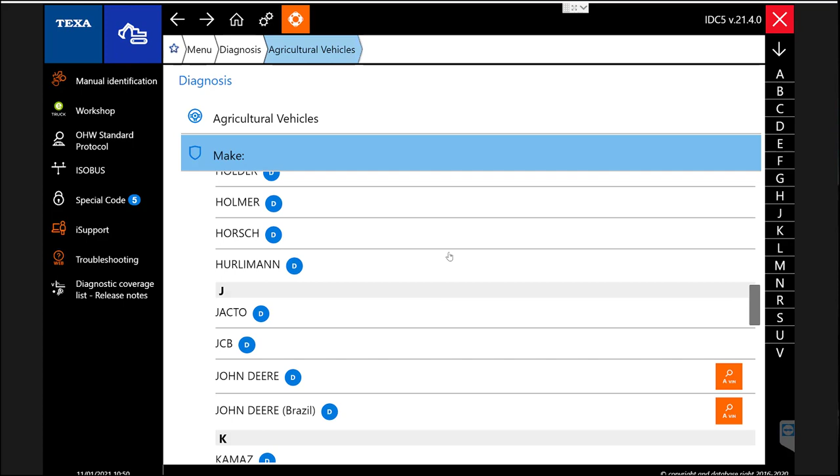I've been asked if I can just show a little bit of the coverage of off-highway software, particularly the construction vehicles. So we'll go into off-highway and we're going to go and have a look at construction, but just so you know, this is everything that you get in off-highway. So agri vehicles, so all your agricultural vehicles are listed in here. I'll quickly scroll down through them.

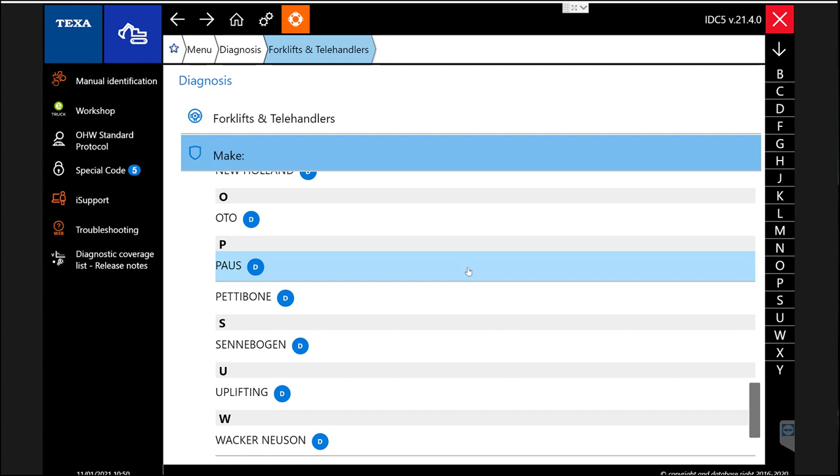Okay, they're your agri vehicles, and your construction vehicles, all the different manufacturers down through there. There's a good range of them available. It also gives you forklifts and telehandlers, so all the major ones will be found in there. Okay, and trains, if you're working on a locomotive, the engines you'll find in them usually.

Industrial engines, so if you can't find a make or manufacturer that you're looking for, because you could be working on, I don't know, a crusher in a quarry, or you could be working on a big generator or anything like that, rather than looking for the manufacturer, or if you can't find a manufacturer because there may not be one, you know it's got an engine in it that's running it usually. So you're more than likely going to find it in here.

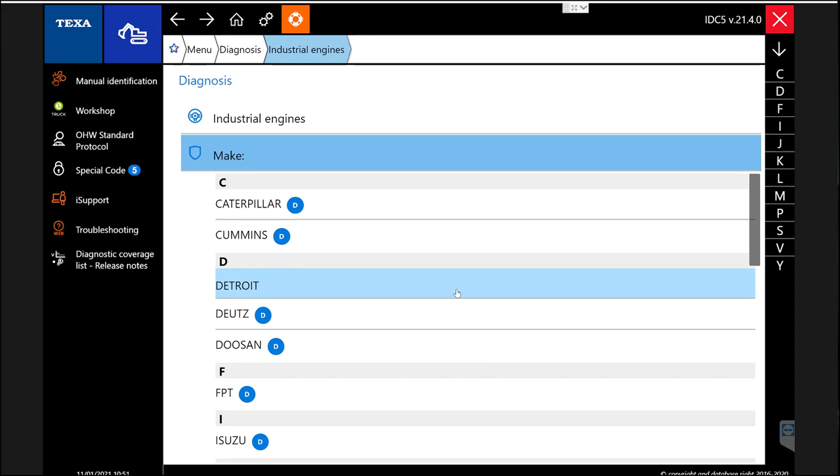So there's always a way to connect to something. If it's got a diagnostic plug, there's a good chance that you're going to be able to communicate with it with Texa. So, construction vehicles. I'm just going to scroll through this list a little bit slowly. Somebody's asked me what sort of make and models it covers. Well, the easiest way is to do this.

Now, if you want this information, you can always register at Texa UK, texa.co.uk, and if you register on their website, you can actually go through the software list to have a look at the coverage of all sorts of stuff. There we go, they're all on there.

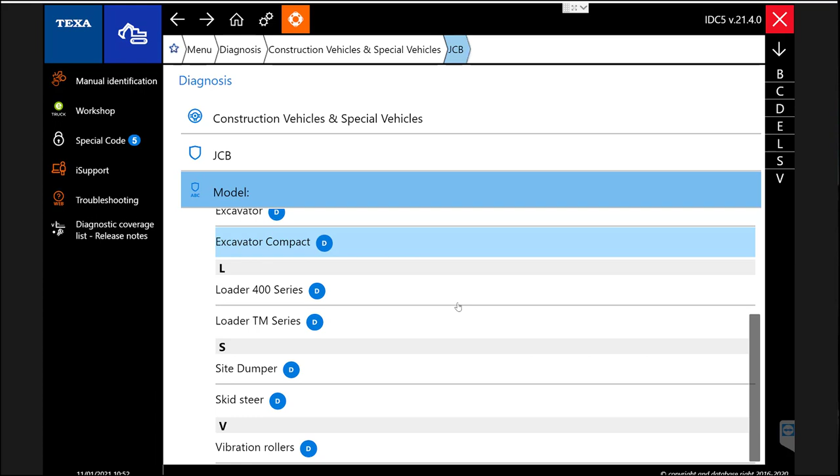So let's go and have a look at something. I think Liebherr's got a pretty good demo on it, but JCB, we could go in there. Let's have a look. What have we got in JCB? Site dumper, why not? Ecomax engine, doesn't give us much information. So let's assume I don't know what cable I'm going to need now to plug into this JCB.

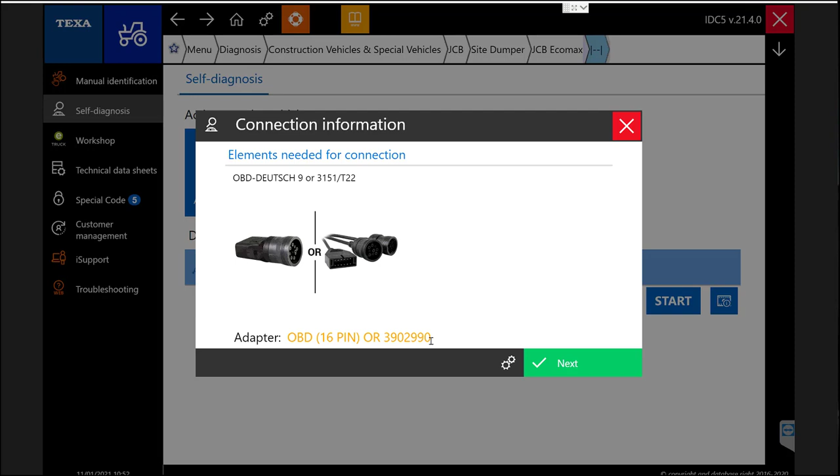We'll hit this little button here, which is the information button, and it tells me I need Deutsch 9-pin. So I can either use a Deutsch 9-pin connected to an OBD cable at that end, or I can use a T22 and the intermediate cable, the 3902990, and then I would click next once I've connected, but as I'm on demo I can't. I'm not sure what this demo software is like on here, so we'll just have a quick look in there. Might choose something else.

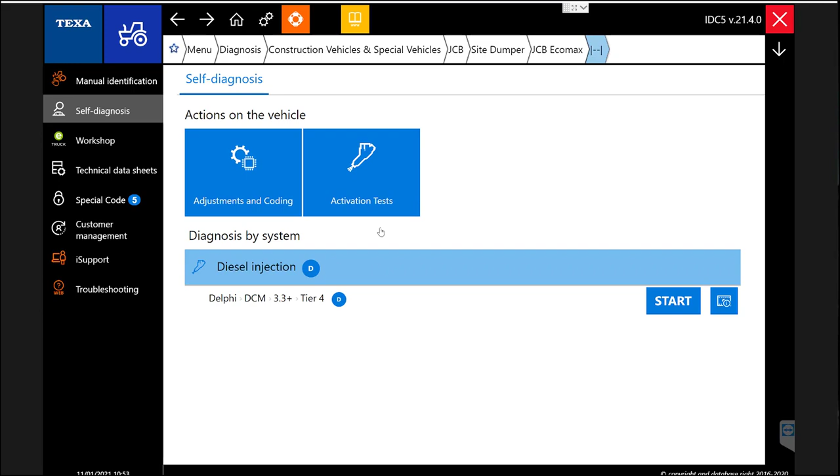Okay, turn on instrument panel. No faults, rubbish one. Let me go and find something better. We'll go to the Liebherr. I'm sure that might have a fault on it. We'll scroll down to Liebherr.

I hope I'm pronouncing that properly. If anybody from Liebherr wants to tell me how to say it properly, then you can tell me off.

Right, what have you got? Excavators, loaders. Why not excavator? Let's go in there. So before I even go in there, this is the system. Engine is available to me. That thing flashing at me was a total global scan 3. That will basically look for any ECUs available and then go and talk to them and see if there's any faults registered and so on.

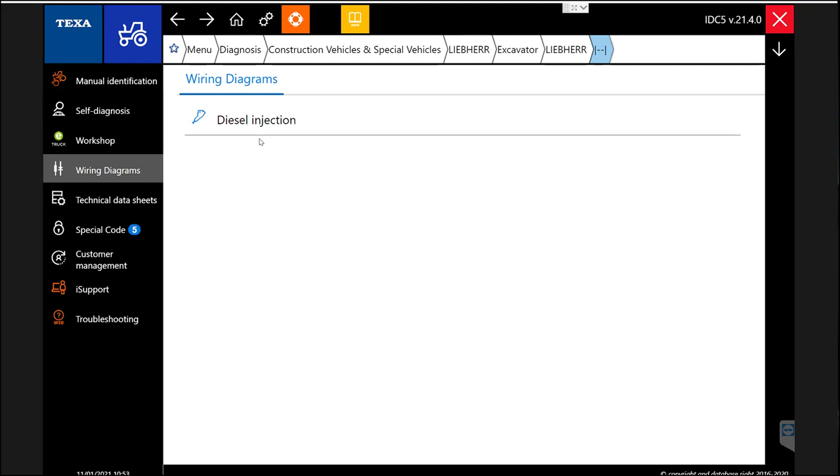But from this page, I can see we've got some wiring diagrams available. So if I click that, it's the engine wiring diagram. I need to choose an engine. I'm just going to pick any of them. The middle one will do.

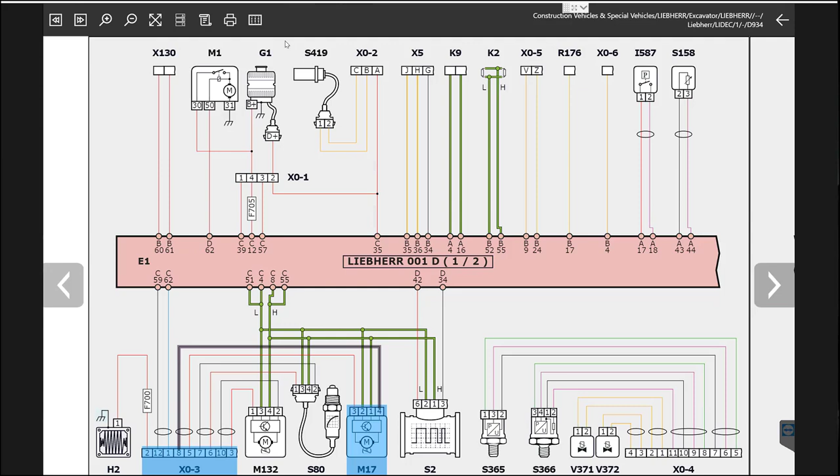And to use that better, to save me looking, if I wanted to see where that wire goes, I can do it that way and I can see it quite clearly, pin 4 of that and what they are. But if I want a bit more information, there's this little icon up here. I can click. Yeah, I don't need to see that again. And it will tell me what it is. Interconnection plug, so it's just a wiring block.

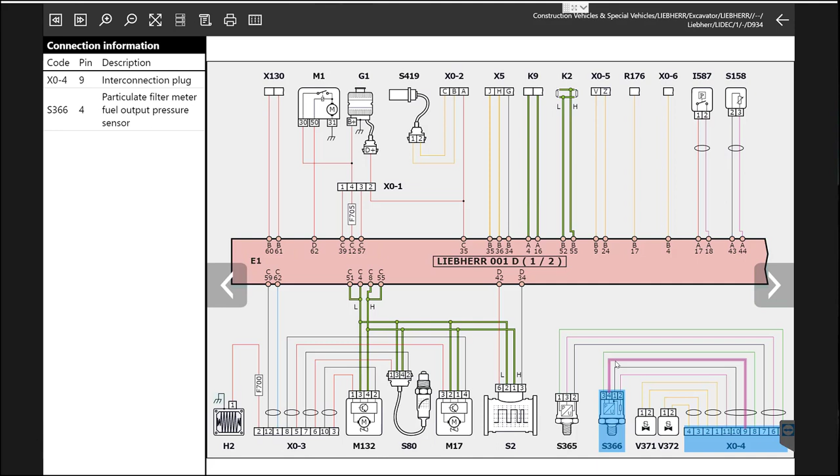And pin 8, and then M17 intake manifold throttle motor module is this fella here. So I can do that with any of them. If I click on them, it does exactly the same thing. I think you get the idea, or hopefully you do. As with Texa wiring diagrams, you can click on a part on these and you will see that there is usually a card of information available.

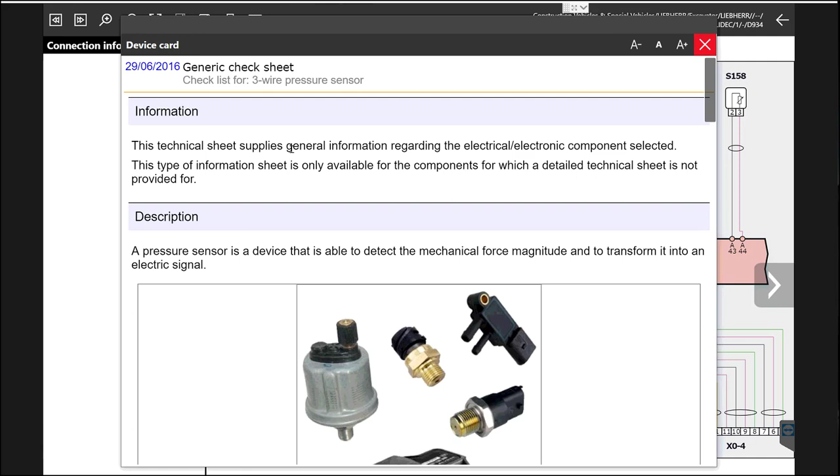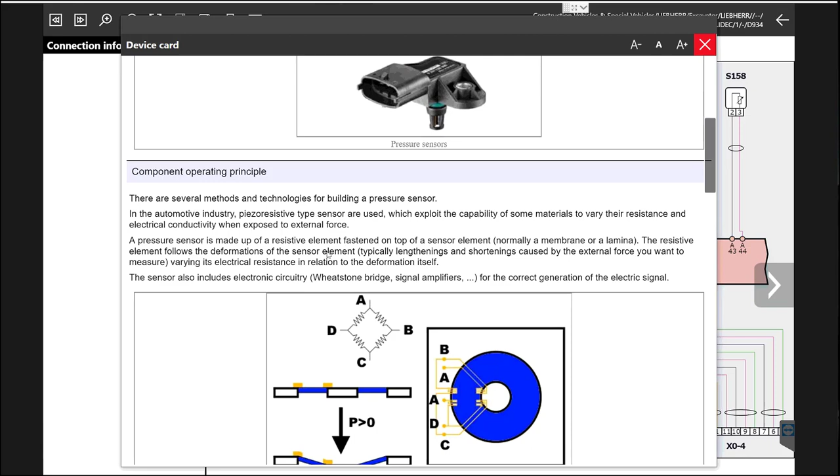So pressure sensor, generic sheet. So this generic sheet will show a range of pressure sensors, what they could look like, different sorts of pressure sensors. Let me make that a bit smaller, that's better. Okay, so it'll tell you how it works. Takes you back to college, look. And then it will tell you what you should be looking for when you're testing them on the pins, references, using an ammeter or a voltmeter.

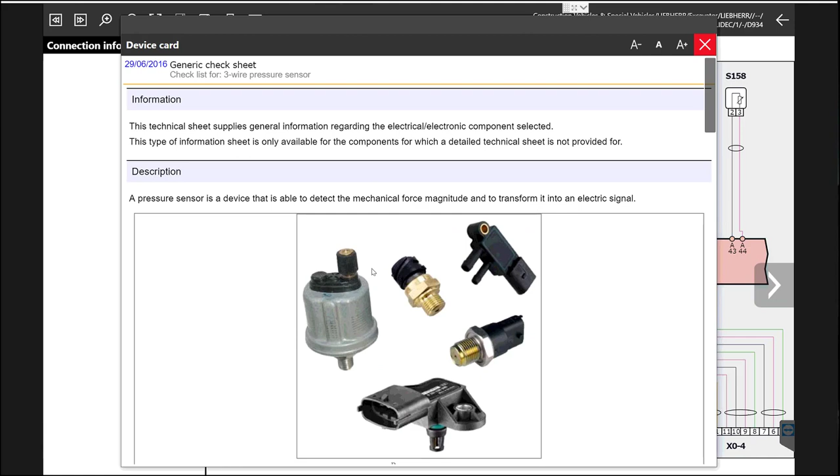So that's all very helpful. This is quite a standard thing for Texa and their wiring diagrams. Very, very helpful. That one was a generic sheet of information. A lot of them now, they're updating them quite a lot at the moment to a component sheet. So rather than generic, covering a range of sensors, if it says component sheet, they are specific to that vehicle. So there's a lot of those updates being done in the background.

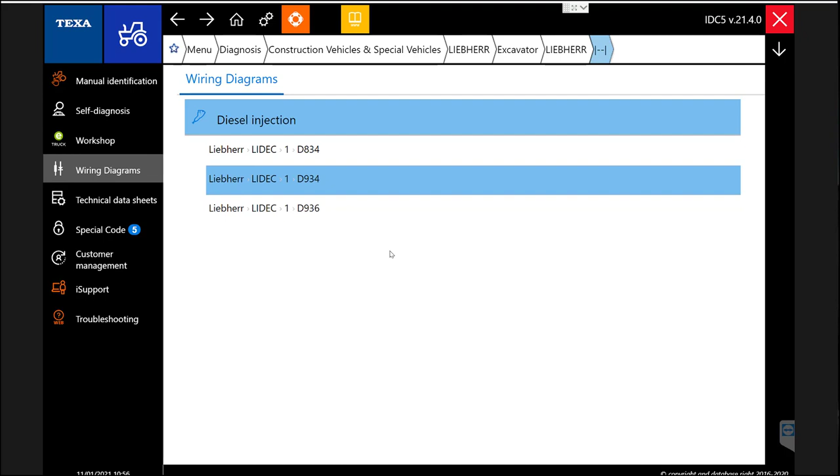Texa are always looking to improve and make things better. So they listen to people. If you're shouting that you want something different, they make it happen.

So, oops, I'll stay in there. We're going to go into diesel injection. Now again, let's assume I've never plugged into one of these before. I have no idea where the diagnostic socket is and I have no idea what cables I need. So I would again use this button here. I will click that and it will tell me here I can either use a Deutsch 9-pin adapter, which is really simple. You just plug your OBD cable in the back of it and then that into the vehicle, or I can use, well, they're saying a T22 here.

And if I use the T22 or a lead like that, I will also need the 3902 intermediate lead, and I will have to power it externally from the battery as well, it's telling me. So obviously not a live pin coming through the connector there. Okay, now this is where I find it. It's somewhere here, so based on the engine panel or under the panel. And there's a little video of this one as well. You get a lot of these on most of them. Shows you where to find it, and you can see it in there hidden away.

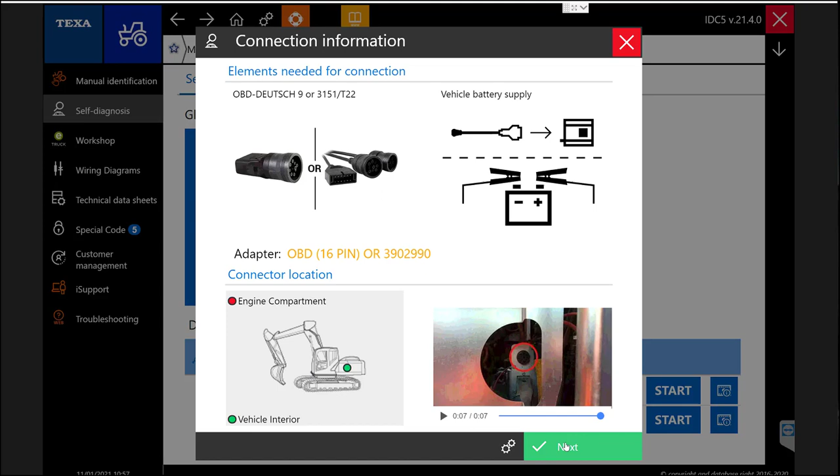Next, these nice sharp bits of metal that you cut your hands on if you're not careful. So you would press next once you've connected your cables. I have to go back here as it's demo software and click demo, and we'll talk to the engine ECU. Turn on ignition. Yes, I have, thank you very much, but I'm not going to wait 30 seconds, I hope.

And just like when you Google something, 95% of it could be a complete load of rubbish. The other 5% might be extremely useful. That is actually a lot better than it used to be now, that web search. I used to moan about it a lot years ago, but we've made some big improvements.

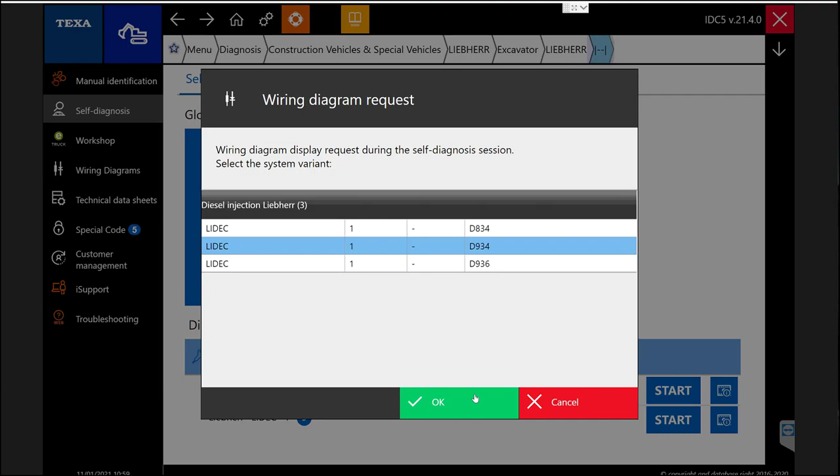So if I click the wiring diagram, I need to choose the engine it's got. I'll just say that one again. It will now highlight that part for me. See it flashing up the top there, boost pressure sensor, and it's put a ring around it. So it's telling me here is where my problem is. It's giving me the card of information if I want to read the information on what to go and look for and test. So it's trying to help me out as much as possible.

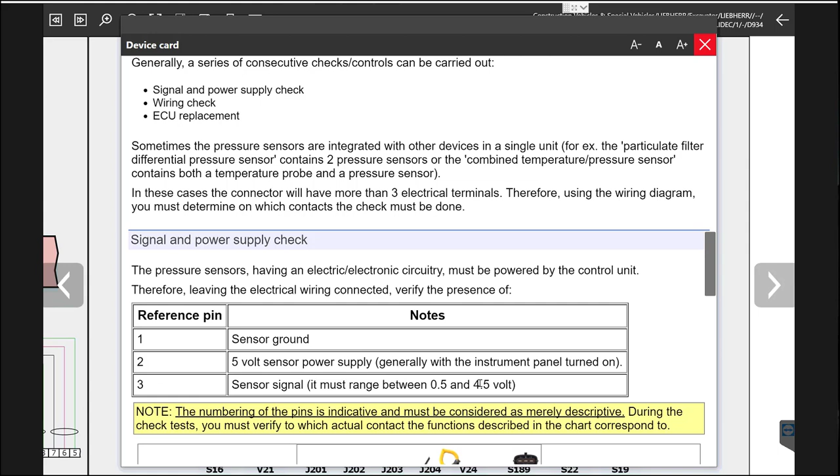So if all these references were good, we know the sensor is good, don't we? And if we've got the 5 volt and everything, that would all be good. But I would guarantee there's probably going to be an issue there somewhere. So you can do your continuity checks down the cables to the ECU, and you've got all your test figures for the actual sensor itself. So I'll come back off the wiring diagram there, back to the faults.

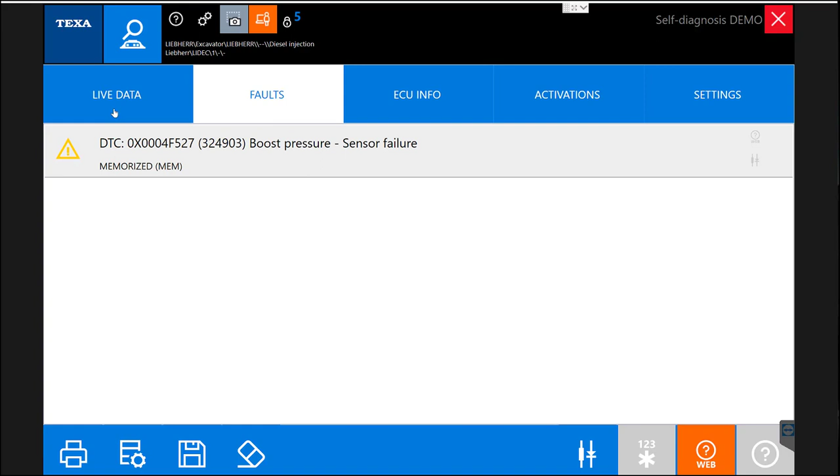If you've seen this before, great. If not, when you first open a page, it always looks exactly the same as this. It defaults to this page first. It will open on the faults page, but you've also got available to you live data. So this is live information coming from the vehicle. Please watch my other videos, because I'll go into this in a bit more depth.

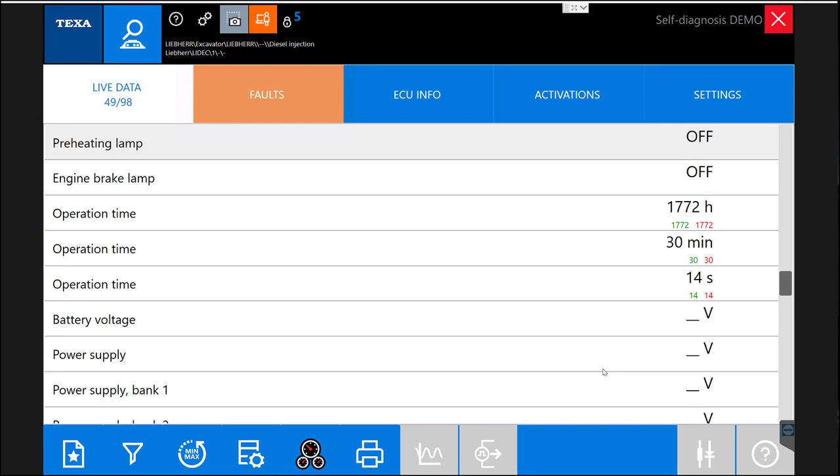So you can look at, there's 98 lines of data here. If I pause, it will then populate the screen I'm looking at. You can double tap on any of these to get a graph, or as many as you want. Double tap on them again to collapse them. And you've also got this little fella here called dashboard, and it gives you a really nice graphic with a lot of information on the page, so you can see exactly what you're looking at.